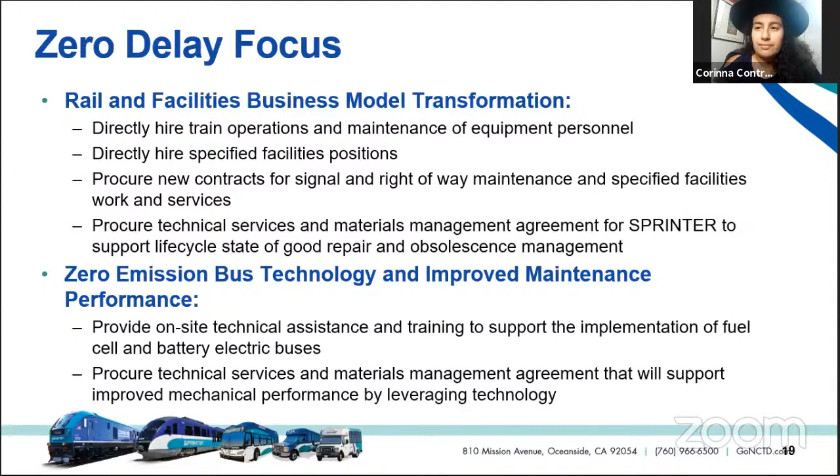The Sprinter is actually a blend of both the Coaster and the bus demographics. If you understand the nature of the bus lines that were replaced to create the Sprinter, and the emergence of Cal State San Marcos, you get that blend of demographics riding. The Coaster, to provide context, was historically created to provide access to jobs originally in the downtown area between San Diego and Oceanside. So it fits the demographic of what it was originally intended to do: address peak period travel to help reduce congestion on freeways.

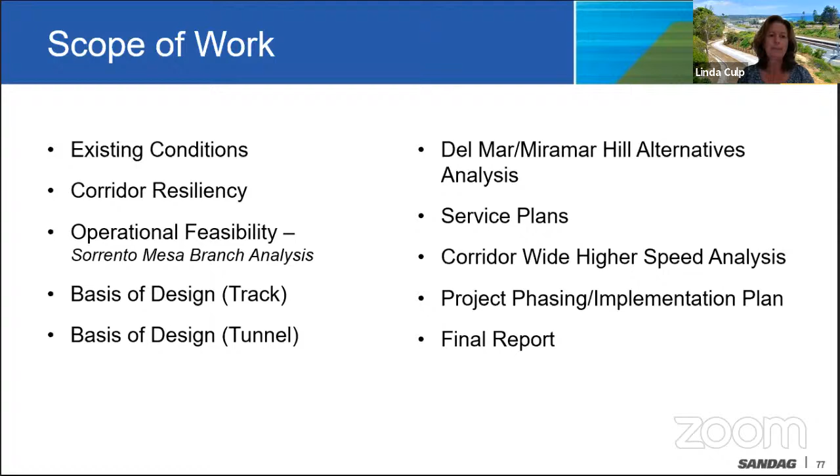We have a project development team. We're very grateful that NCTD staff have been able to participate with us, as well as the other agencies Tracy mentioned. We have an executive leadership task force with representatives from the federal, state, regional, and local level. We had a meeting a week or so ago with that group and gave them a very similar presentation. The Sandag Board of Directors will be hearing a presentation in the middle of next month.

One of the first foundational questions we wanted to ask in the study is whether it's even operationally feasible to run a higher speed service along our corridor, and what that would entail specifically. At this point, I'll turn it over to Hamish and he can run through some of those details with you.

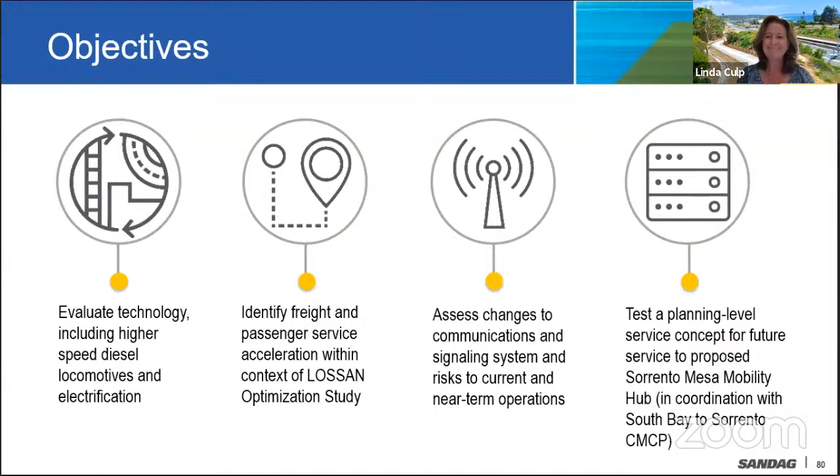The feasibility study for the operations had four primary objectives. The first was to evaluate technology of new locomotives, both diesel locomotives and zero emissions vehicles. Secondly, to understand how these vehicles, along with upgraded infrastructure, could benefit service by accelerating passenger services on the corridor. Thirdly, understanding the changes to communication systems, signaling systems and infrastructure that would be required, as well as, in a fourth task, understanding at a conceptual level the potential impact and design of a Sorrento Mesa branch line, recently outlined in the 2021 regional plan.

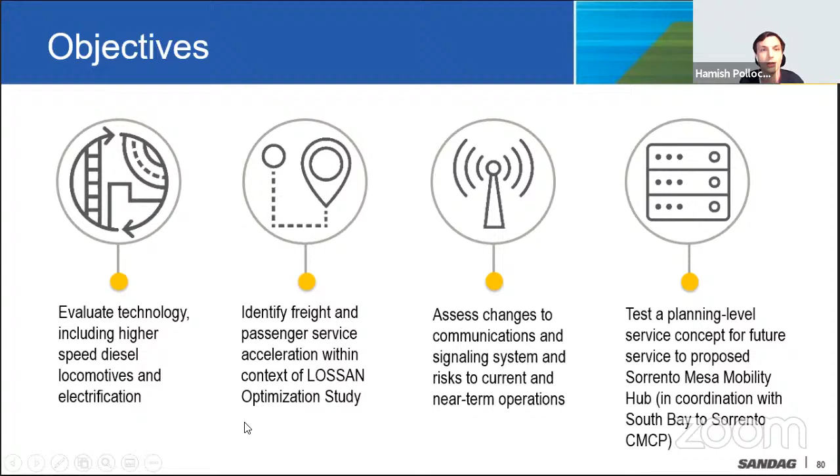As a basis for assumption, this feasibility study builds off all the prior efforts underway on this corridor. There's Sandag's infrastructure development plan, which assumes that the majority of the corridor between the county line and San Diego is double tracked and has been rehabilitated with investment, aside from the last portion of single track, which is the Del Mar Bluffs. However, it's assumed those are stabilized as a basis of design, and of course the tunnels being put forward are looking to create a long-term solution to avoid those bluffs.

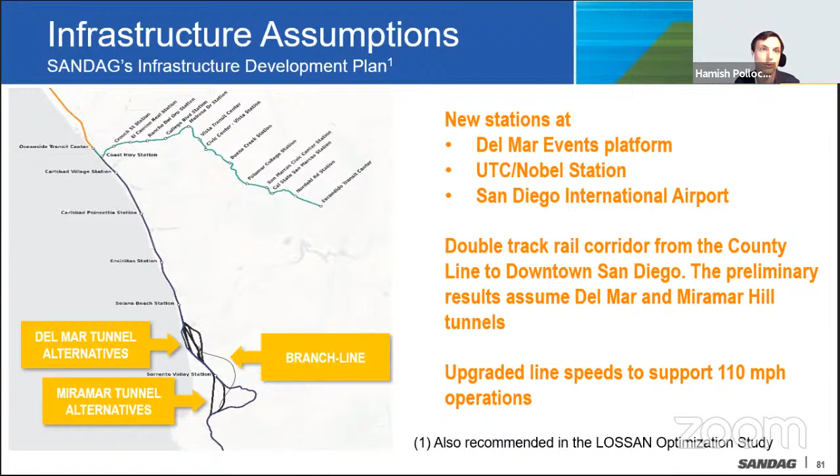The corridor also assumes a couple of upgrades: the Del Mar event platform that has been modeled along with the San Dieguito bridge. Inside one of the tunnels, we've modeled a UTC or Nobel station, and also in the San Diego area, a new airport stop. Lastly, the upgrades would also look at bringing the corridor speeds up to 110 miles an hour.

The two sets of equipment evaluated, as part of understanding how locomotives and train technology will progress, were firstly the new diesel charger locomotives entering service under NCTD, and secondly a zero emissions unit, which is yet to be defined. The new charger diesel locomotive has a top speed of 125 miles an hour, and depending on the service it's pulling, the Pacific Surfliner limited stop service or the Coaster all stop service, has an actual operating speed of either 110 or 90 miles an hour. That's really down to the safety standards of the cars that locomotive is pulling.

The zero emissions unit could represent a number of different solutions on the corridor. It could be a hydrogen powered vehicle, a battery powered vehicle, or some other electrified unit. In this case, we chose the new Stadler Kiss, coming online for Caltrain service, as it has a top speed of 110 miles an hour, and it also represents the key performance parameters we're looking for: very good acceleration and deceleration ability for frequent stopping service.

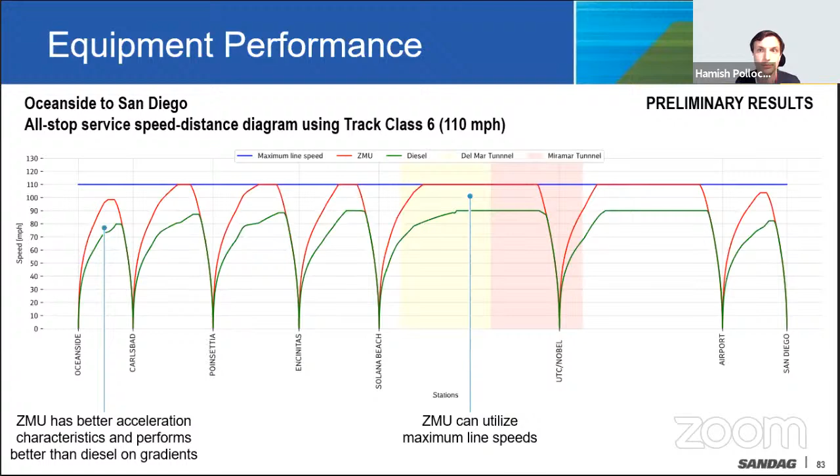On the one hand, there is the acceleration performance of the ZMU. However, when we look at longer sections of track where there is no station present, for example between Solana Beach and the proposed UTC Nobel station, the ZMU also outperforms the diesel as it's able to sustain 110 miles an hour, whereas the diesel unit, although capable of 125 miles an hour, is limited by the safety standards for the cars. Next slide, please.

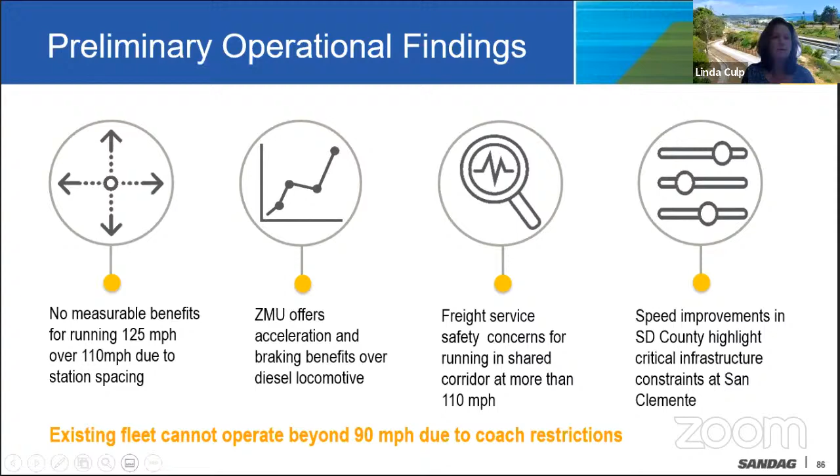Now, the next section, we would like to talk to you a little bit more about some of the alignment refinements that we have made in both the Del Mar and the Miramar Hill areas.

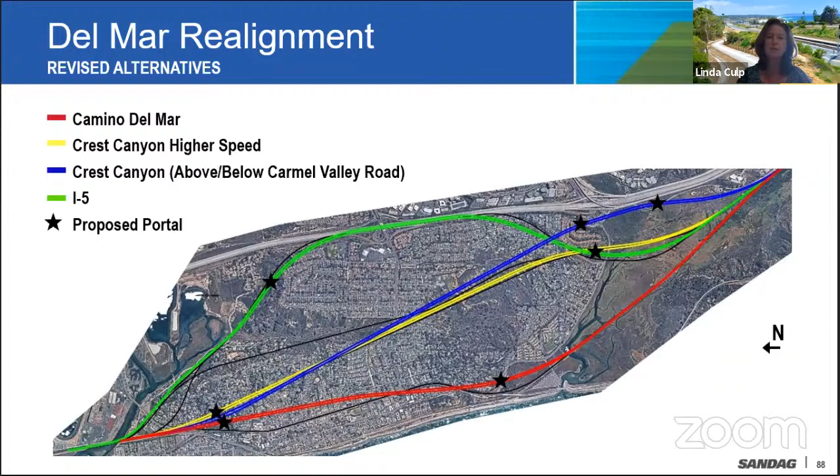The green is proposed for an I-5 tunnel, and you can see how those all look together compared together. The stars are just proposed portal locations for each alignment. Between those stars would be the actual tunnel segments.

Keeping with the 5 alignments, we do have some preliminary information for each. The first column shows the maximum speed allowable for passenger and freight trains. Today, the maximum speed on the San Diego subdivision is 90 for passengers, 60 for freight. You can see how we reach that 110 speed for passengers through 4 of the 5 alignments. However, for the I-5 alignment, we cannot attain that 110—it's 80 maximum speed for passenger.

The middle column shows you capital cost comparison. If we use the Camino del Mar tunnel alternative as the base, you can see at a high level, as we know it right now, how the costs compare, with I-5 being the costliest. It's the longest, it's the costliest of our 5 alignments.

The last section of the table shows you travel time. We've taken a snippet of the corridor from Solana Beach to Old Town. Right now that trip takes Coaster about 31 minutes, and it takes a Surfliner, the limited stop, about 32 minutes. You can see how under the various tunnel alignments those travel times changed, first for the charger locomotives and then for a zero emission vehicle.

You can see that, for example, under 4 of the 5 alignments for a charger scenario, going from that 31 minutes to 28 minutes—and we've just taken out the benefit for a Del Mar tunnel. You can see additional minutes off in terms of zero emission. Lastly, the last 2 columns show more limited stop service or our Surfliner service, and you can see benefits for that service as well.

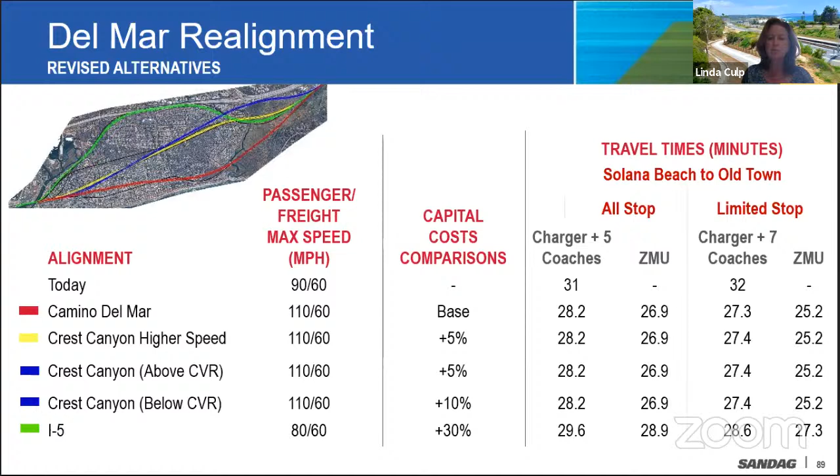What we're recommending is that we take the highest weighted alternative of the 3 Crest Canyon alignments, as well as the Camino del Mar alignment, and carry those into further study, realizing that Crest Canyon above Carmel Valley is very close in total score to Camino del Mar. If we changed one of these scores, we would change that order, but we feel like taking the highest of the 3 in Crest Canyon would be what we want to do moving forward.

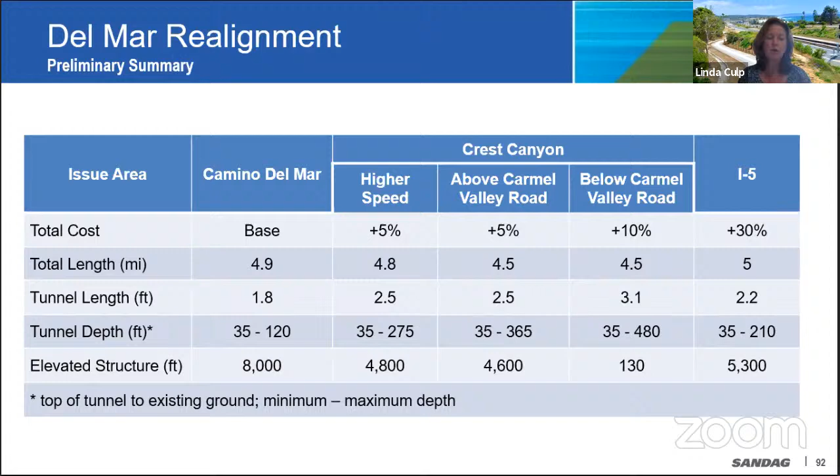To end up the Del Mar discussion, here's a little summary of what we know so far. We talked about cost, the length of the entire project area versus the tunnel length, and you can see how that differentiates between the 5 alignments. The depth also shows some changes, with the below Carmel Valley Road alignment very deep in some portions versus Camino del Mar. To get to and from the tunnel segments, there could be elevated structures, and that's important to keep in mind as we work on all of these alignments going forward.

The second segment of the corridor we've been working on is the Miramar Hill alignment, shown in this graphic. North is to the left-hand side, which is the Sorrento Valley. You can see the 805 freeway as a reference point, where the Sorrento Valley Coaster Station is located. We also painted on the future Mid-Coast Light Rail Corridor, shown in orange, since a connection to Mid-Coast is important to our analysis.

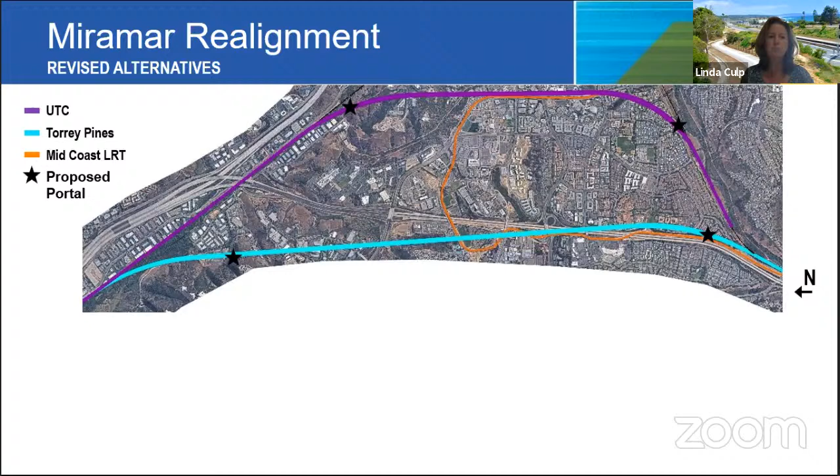We evaluated a couple of alternatives here. One is a UTC alignment, shown in purple. The other is what we're calling a Torrey Pines alignment, shown in blue, where you can see the proposed portals.

Similar to the Del Mar table, our base condition is again 90 mile an hour maximum speed on the corridor for passengers, 60 for freight. However, I'd note this is the slowest segment going up Miramar Hill of all the segments between San Diego and LA. The Torrey Pines and UTC alignments both attain a 110 top speed for passengers, 60 for freight.

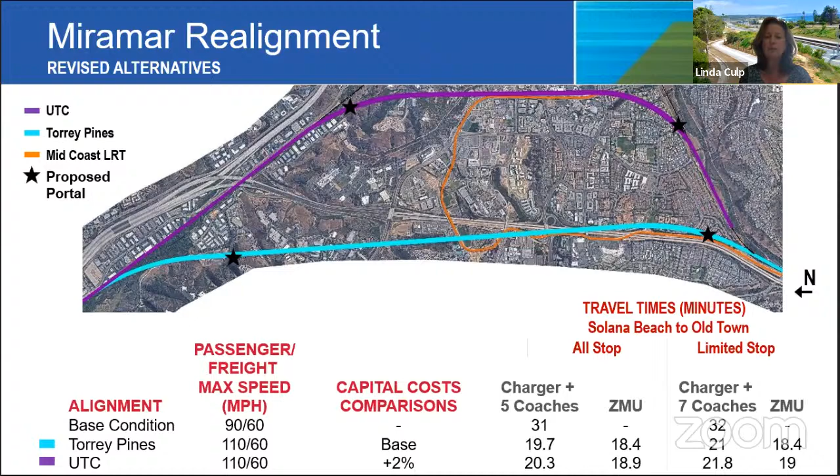Costs are very similar as we know them at this high level of analysis, with UTC being slightly more. Travel times show what Matt mentioned earlier in the presentation: if we get on at Solana Beach and get off at Old Town, on the Coaster all-stop that takes 31 minutes, on Amtrak 32. With the Charger on the Torrey Pines and UTC alignment, there are significant time savings, plus additional savings with zero emission. You see a similar trend with the limited stop or the Surfliner.

We took that same evaluation criteria I mentioned, with the same weights, and applied them to these two alternatives here at Miramar.

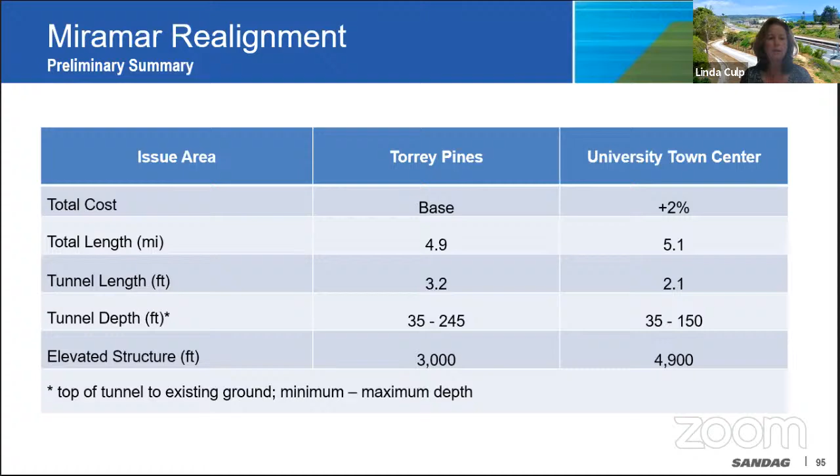Next slide. This also gives a summary as we know it right now in terms of some of the key issue areas. First is cost, and you can see a little bit higher cost with the UTC alignment, a little bit longer, although the tunnel length is shorter and not as deep as a Torrey Pines alignment. And you can see the amount of elevated structure that we propose at this level of study.

So with that, next slide please. I would like to turn things over to Mark Ramsey, and he can run through some of the tunneling details. Thank you, Linda. You could go to the next slide, please.

Thank you. So in the tunneling and fire life safety, I'm going to mainly focus on the tunneling considerations, including the configurations that we've studied, as well as tunnels in similar ground conditions. And then we'll talk about the fire life safety, or FLS, considerations. The two main considerations we'll be discussing today are egress and ventilation.

Next slide. So the first of the tunnel configurations I'd like to discuss is a single bore option. This is a larger diameter tunnel with both trains in the same tunnel. The picture on the left-hand side is a concept where both trains are separated by a firewall, and then there's the safety walk in between. And then there's other configurations, like the upper right where there's no dividing wall, and the bottom right where it's an over and under configuration. Next slide.

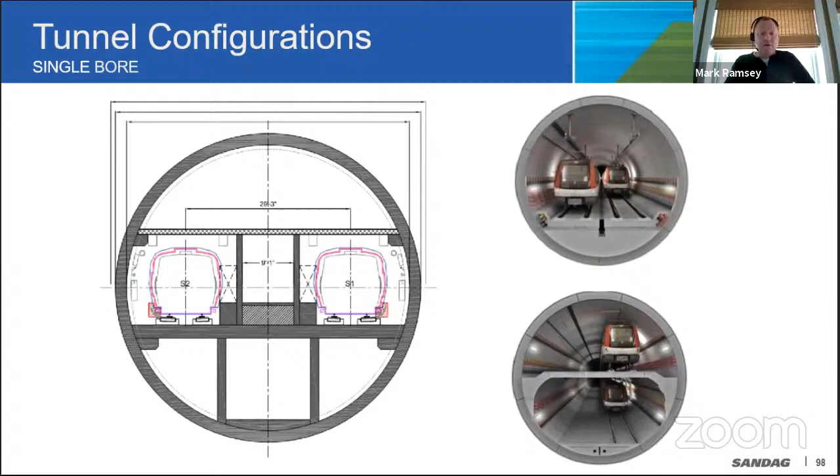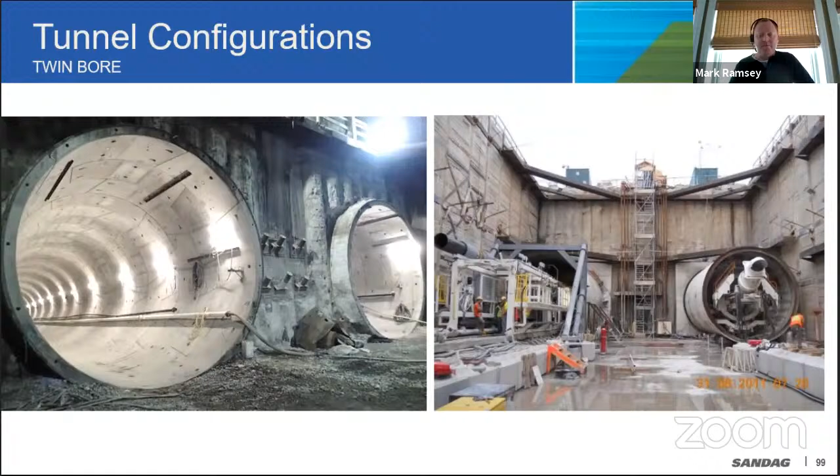Alaskan Way Viaduct up in Seattle completed excavation about a year or two ago, and it was at the time the largest soft ground tunnel boring machine in the world, just over 57 feet in diameter. It was eclipsed after that, by a few inches, by a tunnel in Hong Kong. Next slide, please.

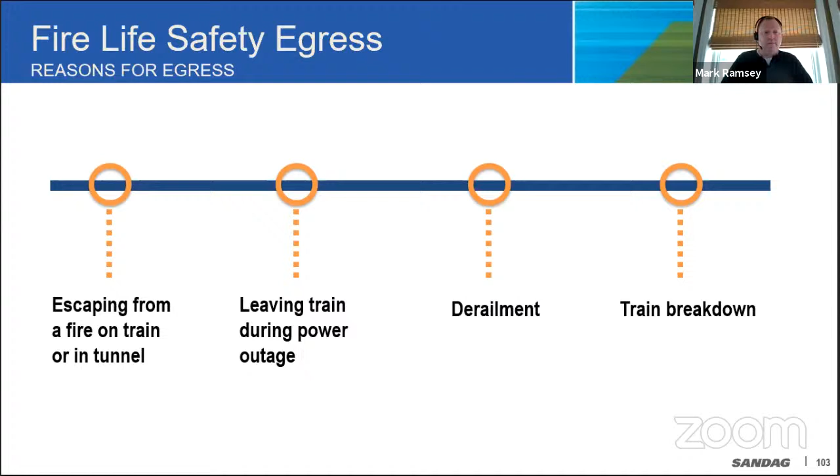NFPA does allow an exit to the surface in lieu of having cross passages. NFPA requires cross passages every 800 feet or an exit to the surface every 2,500 feet, not both - it's an or statement. It will be up to the agency operating the tunnels to decide which means of egress would be better suited for their operations. And then there are walkways, plus emergency signage and markings within the tunnels as well.

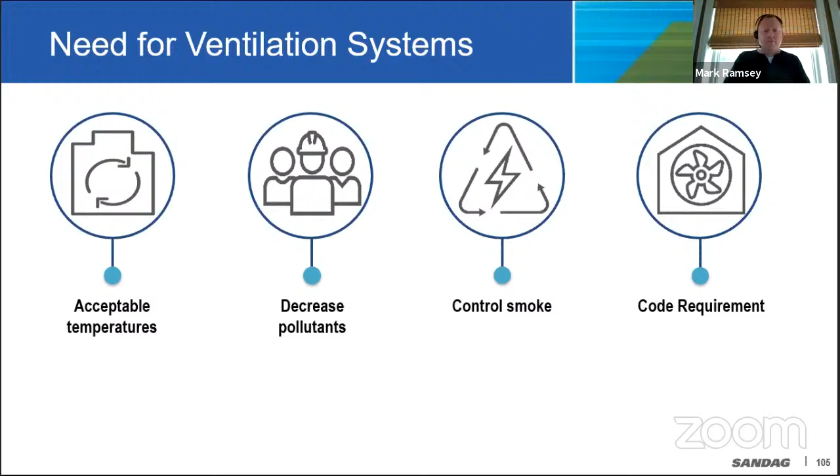So, talk a little bit about tunnels with similar operations - meaning tunnels that have commuter and freight in the same tunnel - and then also some of the operations and maintenance considerations for rail tunnels.

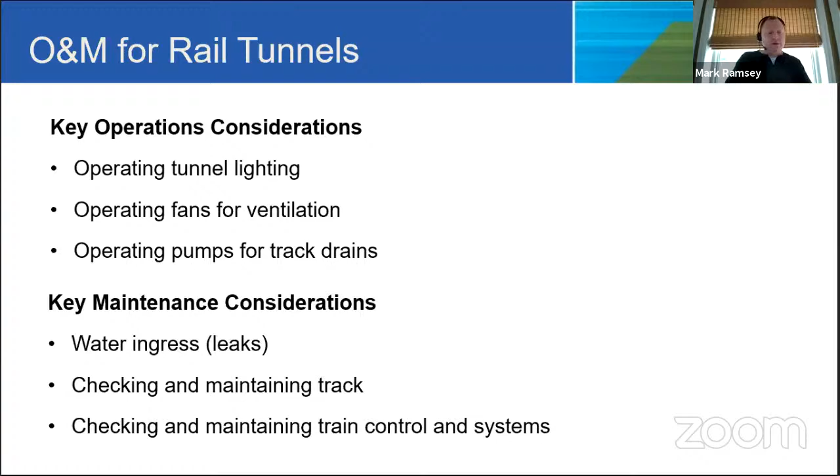Okay, thanks, Mark. Just a couple last points to make - one is in terms of the study schedule. We have some of those basic building block documents. We went through the operational feasibility, some of the basis of design - we'll have those finalized this summer. We'll have the Del Mar Tunnel alternatives analysis finished up this summer and the Miramar Hill right after that. Then we'll turn attention to the entire corridor, the rest of the 60-mile corridor in San Diego, and look at additional improvements that could reduce travel times. We'll end up about this time next year having it all wrapped up, with cost estimates, operations and maintenance estimates for the tunnel projects, phasing and implementation. In future phases of development - for example, an environmental phase on any of these improvements - they're still pending funding.

You had a few key planning considerations listed in the staff report. I think some we've covered, but I'll mention a couple things in ending the presentation. On the first bullet, we're wondering about the impact of the proposed realignments on currently planned projects, like the San Dieguito Bridge, which is in final design and would replace the wooden bridge with a new double track bridge and platforms for seasonal service. The only Del Mar alignment impacting the south end of that bridge is the I-5 alignment, which would head due east quickly off the bridge. All the other alignments would not impact that bridge.

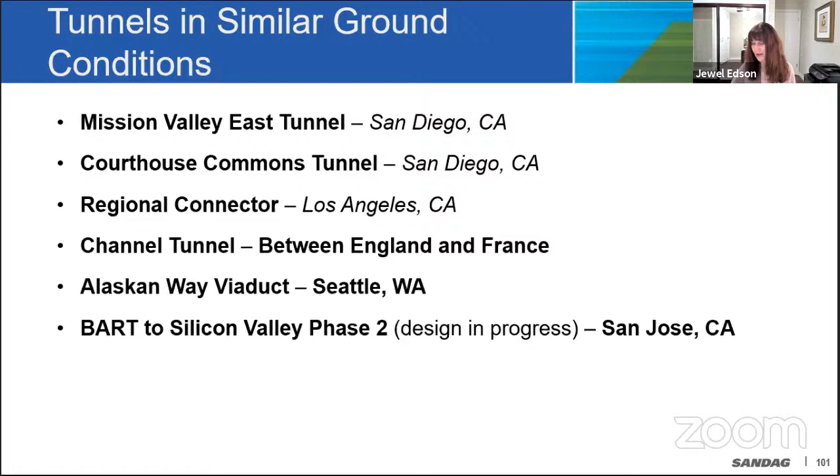You had a slide on ventilation fans — please remind me, what's the requirement for ventilation fans, the 1,000 feet threshold? For the tunnels we're proposing, or studying — the Del Mar tunnels range from 1.8 to, I believe, 2.5 miles.

Miramar and Torrey Pines are a little bit longer than that, so yes, it would definitely require ventilation, and that's something we'll be studying as we go forward with the conceptual engineering. Right now we're proposing that the ventilation be mainly at the portals, so the fans would be at the portals, trying to make those as unobtrusive to the neighborhoods and community as possible. Instead, some agencies have midpoint vent shafts, but I don't think these alignments would be very suited for midpoint vent shafts based on their location in the area.

And those portals were the X's that were on those different tunnels? Yes, right. Okay, yes ma'am.

And study schedule, we've got a year to get this study wrapped up, approximately. No one's holding you to that one.

Then, Linda, I think you mentioned beyond that, doing environmental study. Would that be the last thing that would need to be done in order to get to the time that, say, we could break ground? No, we'd need to do preliminary engineering in support of that environmental document, environmentally clear whatever project it might be, and then finish final design, get to 100% design, and that would make it ready to be advertised for construction.

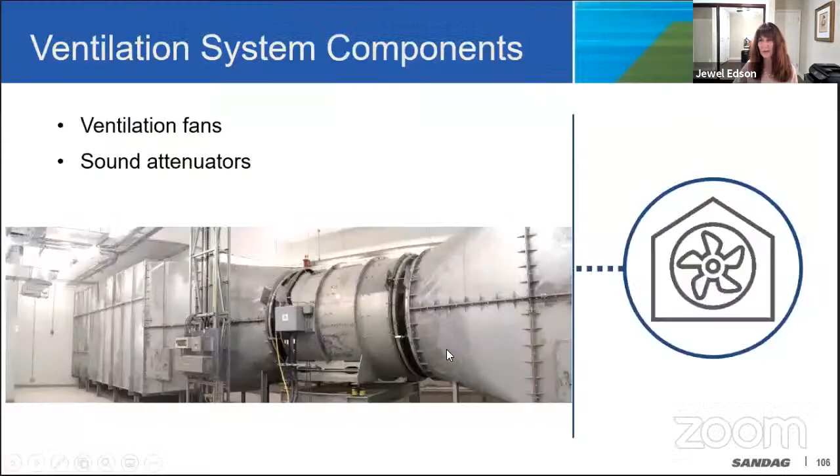Okay, and just one last question. Tunnel configurations, there was twin bore and triple bore. The triple bores seem to be much longer tunnels. Is there anything that you're leaning toward being most suitable? Right now, we think the twin bore is the most suitable.

I have new questions every time I hear this, and that's good. Thank you, appreciate it.

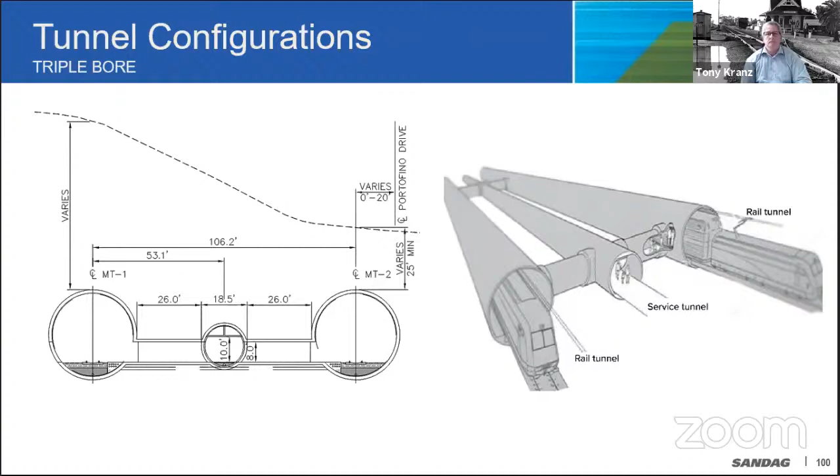Board Member Quirk. Great, thank you. I guess I have a comment. First of all, that these are major projects. I mean, they're huge projects.

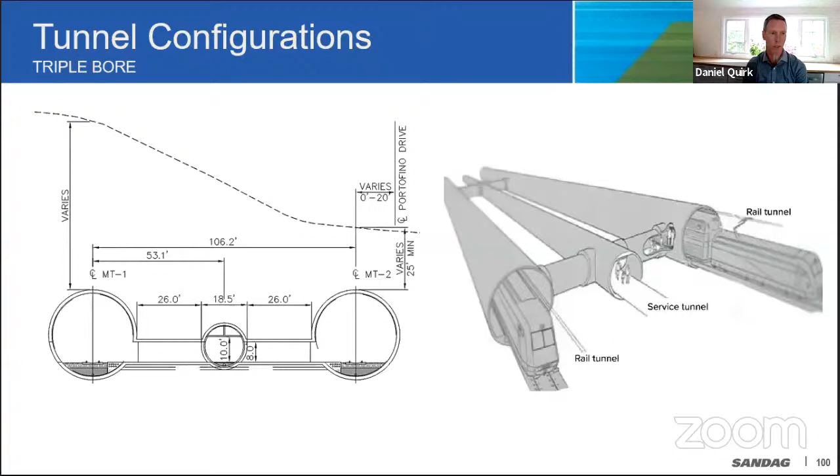And then my second one is, can you explain to me what elevated structure means for Del Mar? I think it was 8,000 feet for one of the proposals. So I guess I'm not understanding what that means, beyond the actual tunnel length, which I think 2.5 miles was one of the ones. That would be the tracks on a structure elevated, not at grade. There'd be a bridge, for example, would be one example. So, something above grade. With the Del Mar one, there's 8,000 feet of elevated structure in addition to the tunnel itself.

Correct, depending on the alternative. Okay, so 8,000 feet, that's a mile and a half or so. Okay, I guess I'm not quite understanding what that is or what that looks like.

Well, so yeah, we don't have any photographs of that, but to get into and out of the tunnel, depending on where that portal is, might require the track to be elevated on a structure. So for example, if you're coming south and you go through the tunnel alignment, and you're in Los Penasquitos Lagoon, then very likely that segment of track for some distance would be elevated above the lagoon, up on a structure above grade. Okay, got it.

And following up on that question, when we did the Los Penasquitos bridge work, there was some talk about sea level rise and whether we should elevate the structure through that lagoon at the time. And because it was state of good repair, we stuck with the essentially ballast on grade that had been 130 years old that was put through that lagoon.

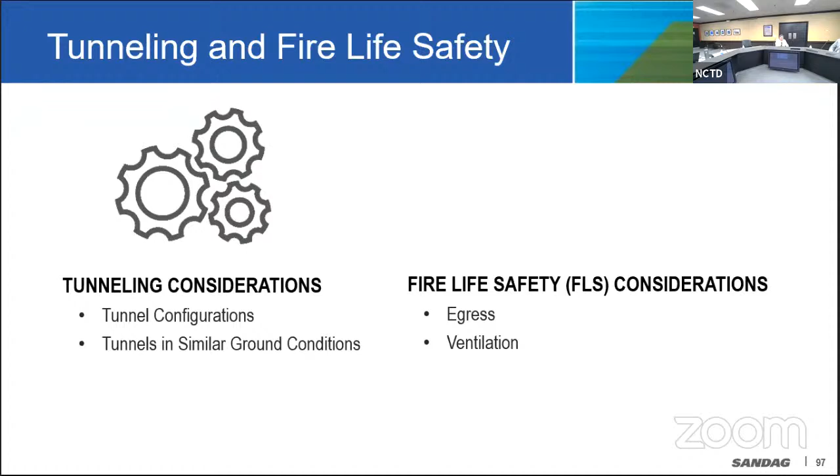My name is Dr. Udo Wong, 1227 Stratford Court, Del Mar, resident for 38 years, submitting public comment on item number 12, 4/22/2021. I support the realignment of the train tracks off the bluffs. The catastrophic bluff failure would threaten lives and cause severe economic impacts on transportation, commerce, tourism, telecommunications, air quality, and military readiness. Sandag ran a cost-benefit analysis of what it would take to repair the impacts of a 400-foot-long collapse, estimated at an astonishing $310 million over one year.

One bluff failure was only about 10 feet away from the tracks. It is very urgent that the bluffs are stabilized now in such a way as to consider environmental impacts, and it is critical that the train tracks are moved off the bluffs as soon as possible. I would like to comment also about the idea floated to build seawalls at the base of the bluffs all along the entire Del Mar shoreline from Powerhouse Park to Torrey Pines State Reserve, and to decapitate the bluff top from 8th Street to 11th. This is sheer madness and an assault on the sensitive environment. The precious tidal zone is alive with unique flora and fauna that would be destroyed. This cannot be allowed. Geologist Dr.

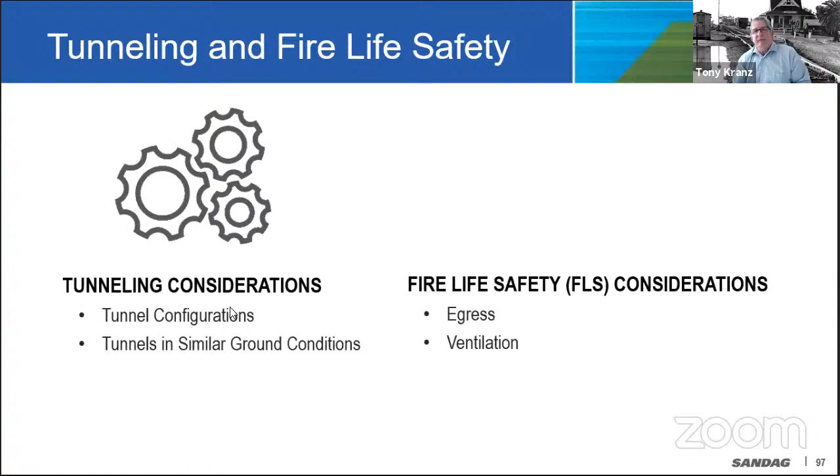Thank you, Linda and Mark and Hamish for your presentation. I know you have a whole lot of work ahead of you, so good luck with all of that.

Moving on to the executive director's report. Mr. Tucker, do you have anything for us today? Yes, I will just share something quickly. We are working with our contractor MV Transportation on Breeze bus operator staffing. One of the things I wanted to share with the board proactively is that there is a shortage of employees on the bus system.

It's an emerging trend throughout the industry. There was a recent article identifying that LA Metro needed to hire about 800 employees. We are working with them closely to advance as much hiring as we can. We're hopeful that as unemployment benefits are reduced in August, more folks will attempt to return to work. We have about 15 employees out for various short-term and long-term issues, but there are going to be some potential near-term impacts to loss of service as we go through this process of rehiring approximately 38 to 40 new bus operators. I wanted to share that proactively with you all.